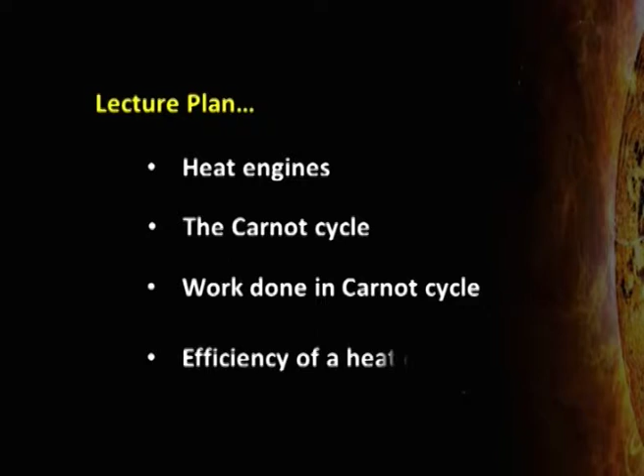In continuation, today we are going to discuss heat engines, Carnot cycle, work done in Carnot cycle and efficiency of heat engines. At first, let us discuss what is a heat engine. The flow of heat from a hot body to a colder body is a spontaneous process. The heat which flows spontaneously can be converted to useful work with the help of some device.

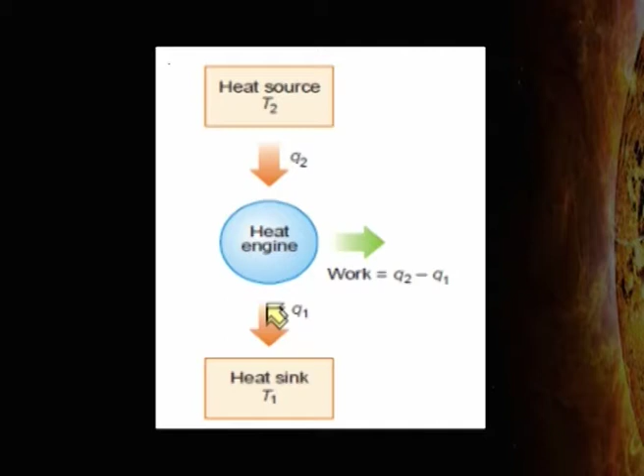A machine which can do work by using heat that flows out spontaneously from a high temperature source to a low temperature sink is called a heat engine. A heat engine works between two heat reservoirs, the hot reservoir and the cold reservoir. The hot reservoir is known as source and the cold reservoir is known as sink.

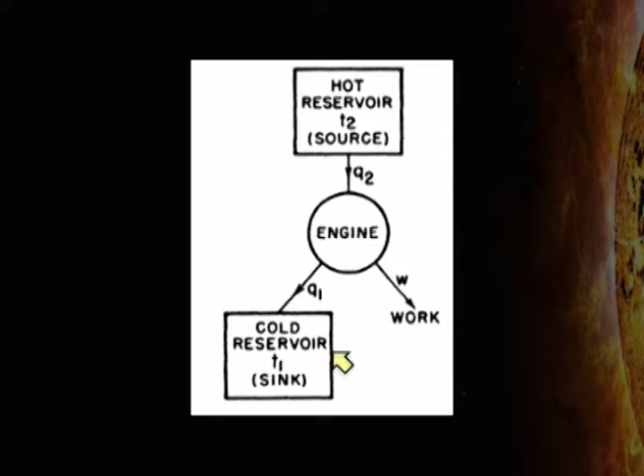Steam engine is a typical type of heat engine which extracts heat from the hot reservoir known as source, converts some heat to useful work and throws the remaining heat to the surroundings, which acts as cold reservoir, that is sink. A heat engine running in periodic cyclic processes can produce work continuously.

Now, what is efficiency of a heat engine? The ratio of work done by the heat engine to the heat absorbed by the heat engine from the source, that is from the hot reservoir, is called the efficiency of the heat engine. No heat engine, no matter how well it is constructed, can be 100% efficient. That is, no heat engine can convert all the heat extracted from the source to useful work. Some of the heat has to be thrown out to the cold reservoir, that is sink.

Sadi Carnot was the first scientist to realize this and deduce an expression for the work done in the Carnot cycle. Carnot employed a reversible cycle to demonstrate the maximum convertibility of heat into work. Carnot's engine or Carnot's cycle consists of 1 mole of a gas and it operates in 4 successive steps known as 4 strokes.

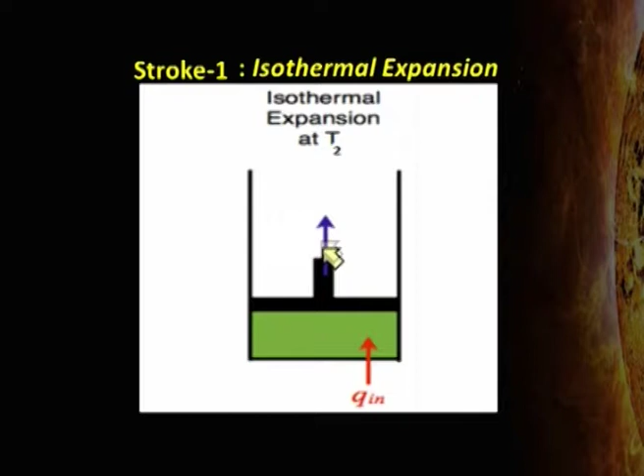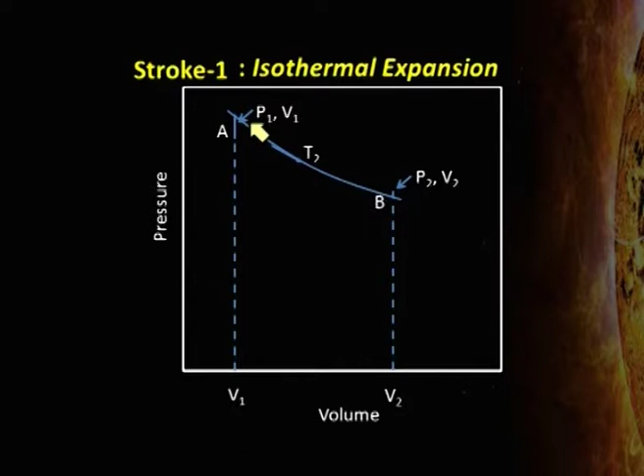Let us discuss the first stroke. It is isothermal expansion of the ideal gas. Ideal gas takes some heat from the source and it gets expanded. The gas is allowed to expand reversibly and isothermally at the temperature T2 so that the volume increases from V1, shown by the point A, to V2, shown by the point B, and pressure of the gas decreases from P1 to P2.

Since in isothermal expansion of an ideal gas, internal energy change remains 0, that is delta U remains 0. Hence, from first law of thermodynamics, delta U = Q + W, we can see that Q will be equal to minus W. In expansion, work is done by the system, hence work is taken to be negative. Therefore, from first law of thermodynamics, Q = -W.

If we say that Q2 is the heat absorbed by the system and W1 is the work done by the system, then Q2 = -W1, which will be equal to R T2 ln(V2/V1). This we have taken as equation number 1.

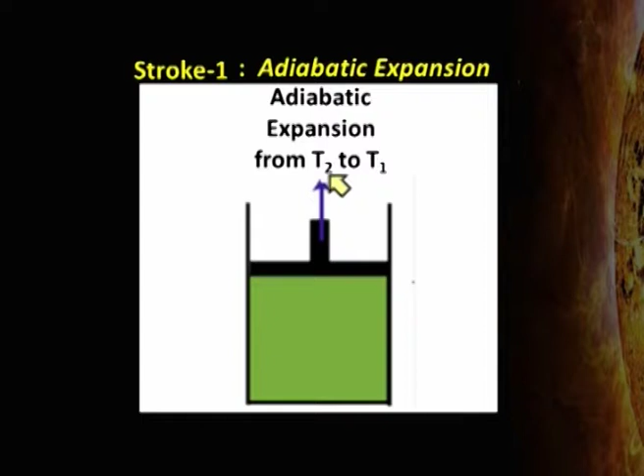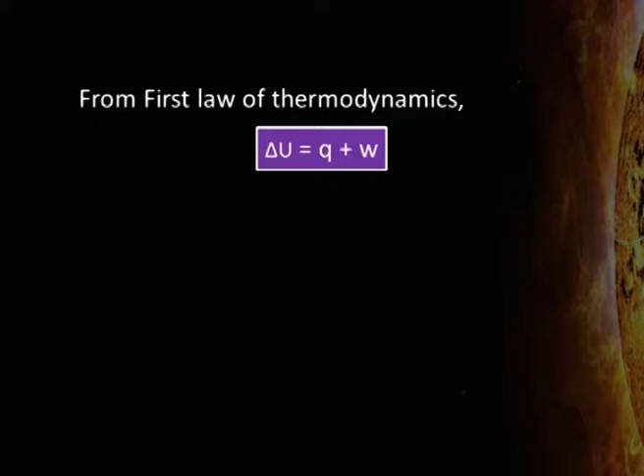As work is done here by the system adiabatically, the system cannot absorb any heat. Therefore, Q will remain 0. Now from first law of thermodynamics, delta U = Q + W, we will get delta U = W. Here also expansion is going on, hence work is done by the system on the surroundings. Hence by definition we will get CV = dU/dT at constant volume.

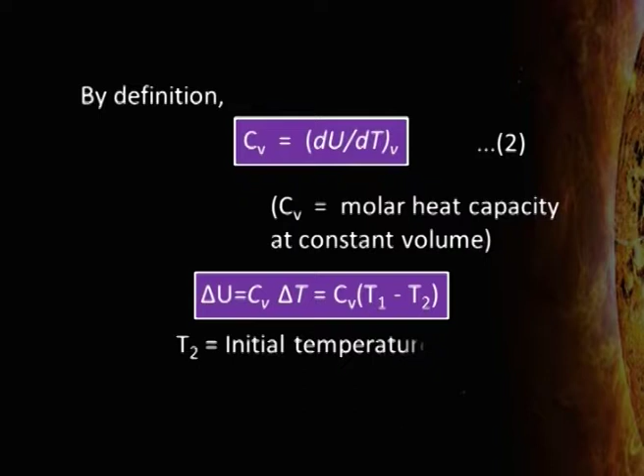Here CV is the molar heat capacity at constant volume. This is equation number 2. Now for a finite change, delta U will be equal to CV delta T, or we can say CV (T1 minus T2). Here initial temperature is T2 and final temperature is T1. Therefore, CV (T1 minus T2) will be equal to minus W. This is equation number 3.

Delta T is the change in temperature, which is equal to final temperature minus initial temperature, or we can say that minus W equal to minus CV multiplied by (T2 minus T1), which is taken to be equation number 4. If the work done in this stage is denoted by W2, then we will get minus W2 equal to minus CV multiplied by (T2 minus T1). It is equation number 5.

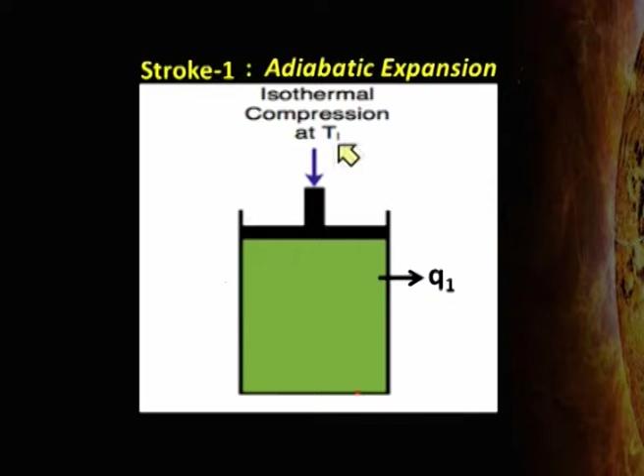Now we will go to third stroke. Third stroke is reversible isothermal compression at temperature T1. Here the gas will release some amount of heat which is taken to be equal to Q1. During isothermal compression, the temperature remains same at T1. Volume decreases from V3, which is denoted by point C, to V4, which is denoted by point D. Pressure increases from P3 to P4.

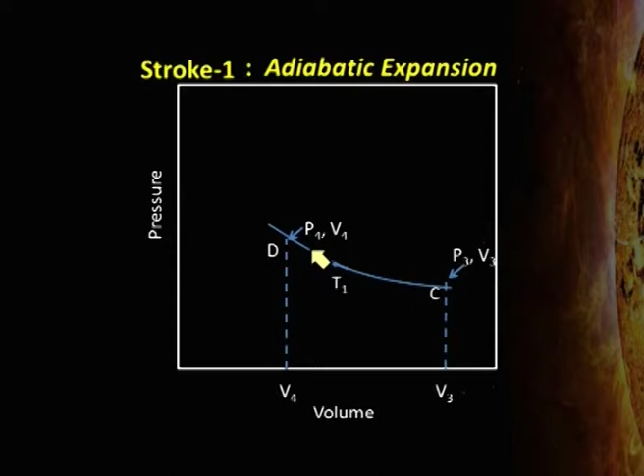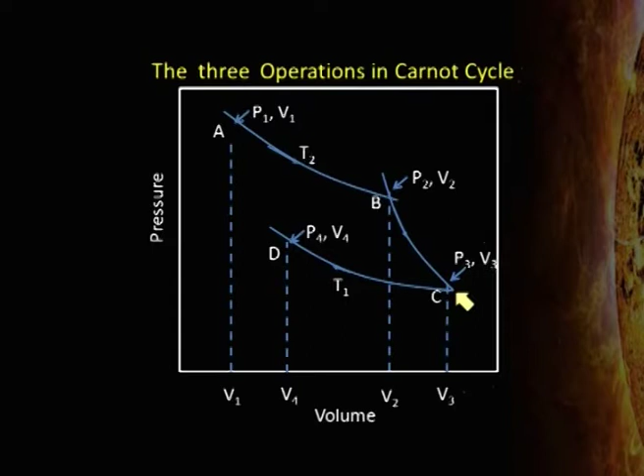You can see the 3 steps in succession. First one, reversible isothermal expansion. Second, reversible adiabatic expansion. And the third one, reversible isothermal compression. In isothermal compression, delta U will be equal to 0. And in compression, work is done on the system by the surroundings. Hence, W will be taken to be positive.

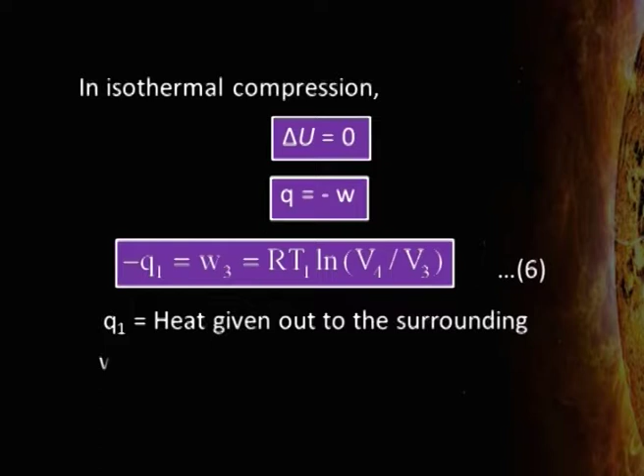From first law of thermodynamics, we can say that delta U is equal to Q plus W, and as delta U is equal to 0, hence Q will be equal to minus W. But as work is done on the system, therefore work is taken to be positive. Hence, we can say minus Q1 equal to W3 equal to R T1 natural log V4 upon V3. This is equation number 6. Q1 is the heat given out to the surroundings and W3 is the work done in third stroke.

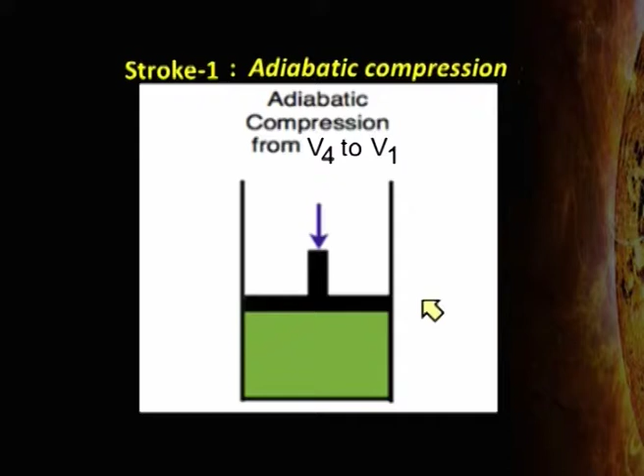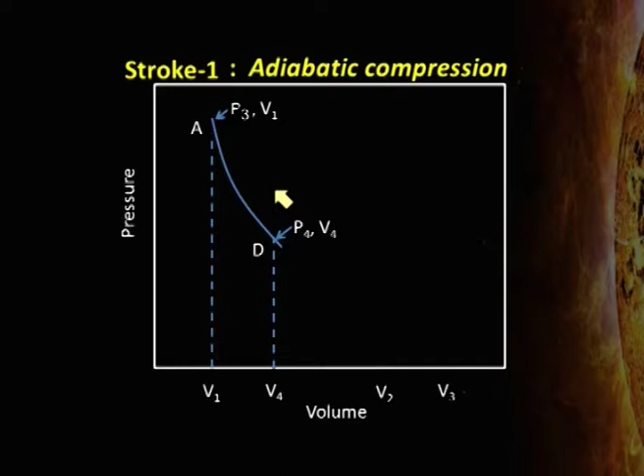In fourth stroke, we will go to reversible adiabatic compression. Here, the gas will be compressed from T1 to T2 and no heat will be absorbed or given out because the process is adiabatic. The adiabatic compression is done from V4 to V1. The volume of the gas decreases from V4 denoted by point D to V1 denoted by point A. Pressure will increase from P4 to P3.

The third operation is from C to D, which is reversible isothermal compression. The system changes from P3 V3 to P4 V4 at constant temperature T1, and the amount of heat which is evolved is equal to Q1. And the fourth step is reversible adiabatic compression D to A, and the state of the system changes from P4 V4 to P1 V1. Here no heat will be absorbed or evolved, but temperature changes from T1 to T2.

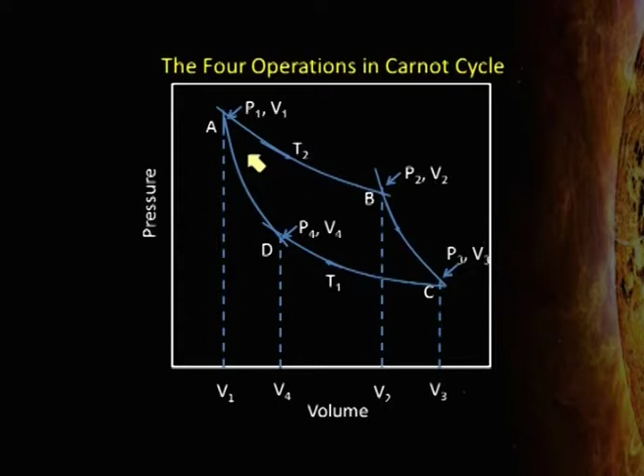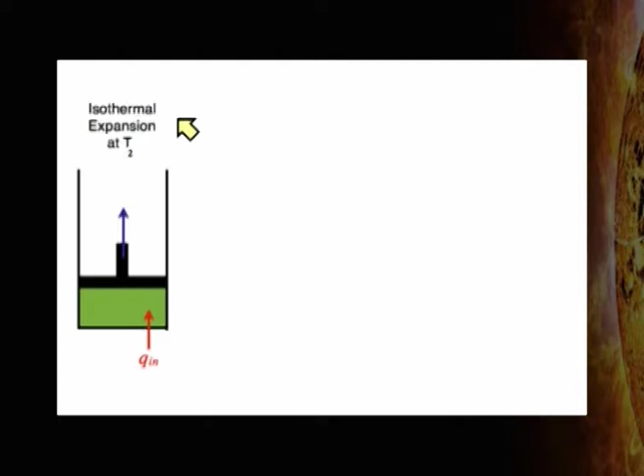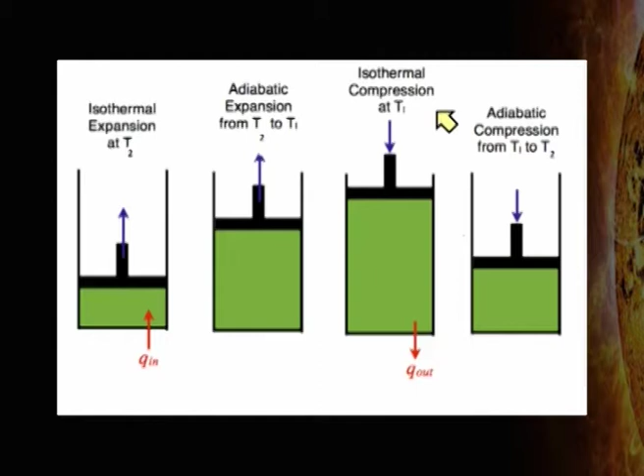First operation is isothermal expansion at temperature T2. Second, adiabatic expansion from T2 to T1. Third one, isothermal compression at temperature T1. And fourth one, adiabatic compression from temperature T1 to T2. Now in fourth step, as it is adiabatic, no heat will be evolved or absorbed. Hence, Q will be equal to 0.

And from first law of thermodynamics, we know that delta U is equal to Q plus W. Therefore, delta U will be equal to W. In compression, work is done on the system. Therefore, work has to be taken to be positive. Therefore, delta U will be equal to CV delta T, which is equal to CV (T2 minus T1). If W4 is the work done in this stage, then W4 will be equal to CV multiplied by (T2 minus T1). This is equation number 7.

Here T2 minus T1 is the change in temperature, which is also the increase in temperature in adiabatic process. If we take the net heat absorbed in complete cycle equal to Q, then it will be equal to the heat absorbed in first cycle plus heat released in third cycle.

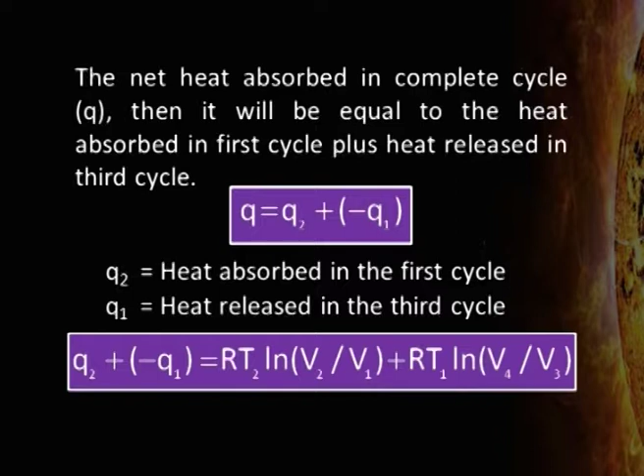Hence, total heat Q will be equal to Q2 plus minus Q1. It is because Q2 is the heat absorbed in the first cycle and Q1 is the heat released in the third cycle. So, Q2 plus minus Q1 will be equal to R T2 natural log V2 upon V1 plus R T1 natural log V4 upon V3. This can be written as R T2 natural log V2 upon V1 minus R T1 natural log V3 upon V4. This is equation number 8.

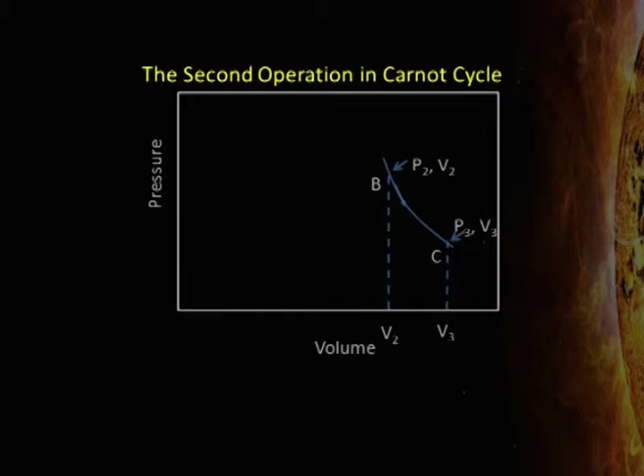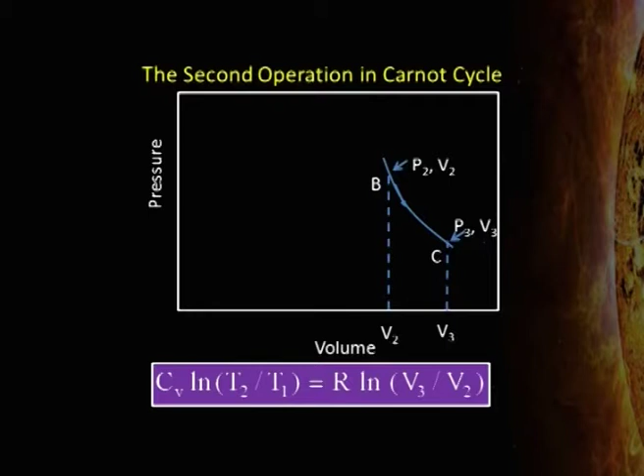For any adiabatic expansion for an ideal gas, we can take the example of the second and fourth steps in the Carnot cycle, which are adiabatic processes. If we take the example of the second step in the Carnot cycle from B to C, we can say Cv natural log T2 by T1 equal to R natural log V3 upon V2. And if we take the example of the fourth step in the Carnot cycle, which is also adiabatic from D to A, we can say that Cv natural log T2 by T1 equal to R natural log V4 by V1.

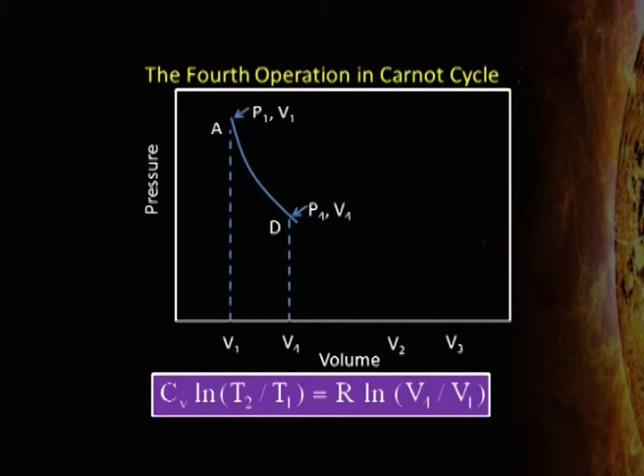Now from these two equations, we can say that V3 upon V2 equal to V4 upon V1, or V2 upon V1 equal to V3 upon V4. This is equation number 9. Hence, putting this value in equation number 8, we can get the value of Q, which is equal to Q2 minus Q1 equal to R (T2 minus T1) natural log V2 upon V1. This is given the equation number 10.

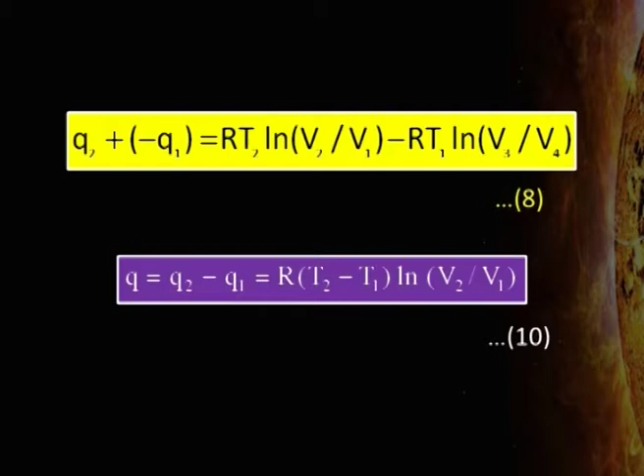Similarly, the net work done in the complete Carnot cycle can also be calculated. In the first and second step, the work is done on the surroundings by the system. Hence, the work done in the first step and second step are to be taken negative. In the third step and fourth step, work is done on the system by the surroundings. Hence, in these steps, work is taken to be positive.

Therefore, total work will be equal to minus W1 minus W2 plus W3 plus W4, which is equal to R T2 natural log V2 by V1 minus Cv multiplied by (T2 minus T1) plus R T1 natural log V4 by V3 plus Cv multiplied by (T2 minus T1). This is equal to R T2 natural log V2 upon V1 minus R T1 natural log V3 upon V4. This is equation number 11.

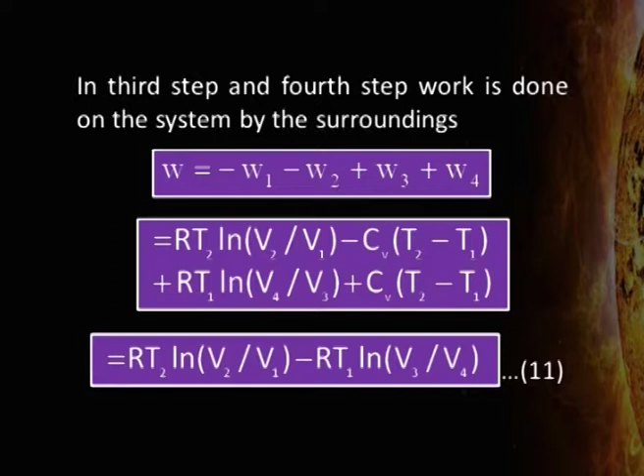Now putting the value of V3 upon V4 from equation number 9, which gives V2 upon V1 equal to V3 upon V4, we will get W equal to R multiplied by (T2 minus T1) natural log V2 upon V1. This is given to be equation number 12. It follows from equation 10 and equation 12 that Q is equal to W. Hence, the condition that the net work done by the system and the net heat absorbed by the engine are equal is fully satisfied.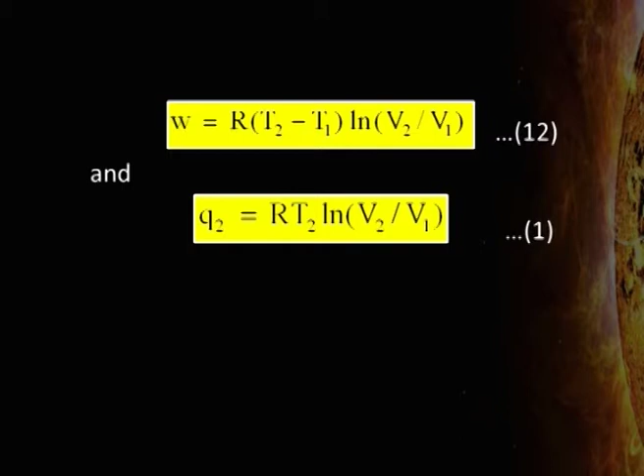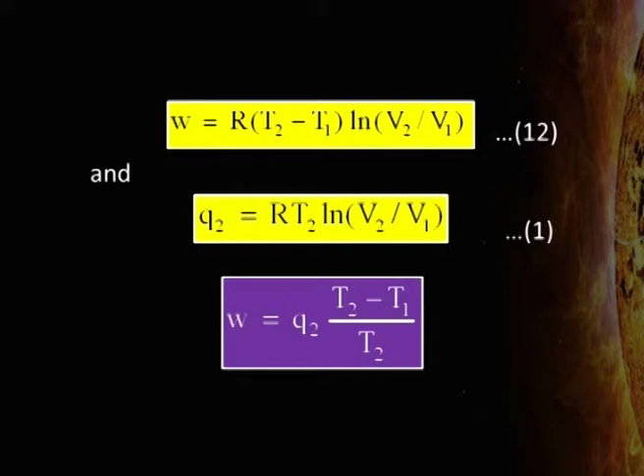The relationship between W, that is the net work done, and Q2, that is the heat absorbed from the source, meaning the reservoir at high temperature, can be derived for the Carnot cycle from two equations: equation number 12, which is W equal to R (T2 minus T1) natural log V2 upon V1, and equation number 1, which is Q2 equal to R T2 natural log V2 upon V1. Now from equation number 12 and equation number 1, we get W is equal to Q2 multiplied by (T2 minus T1) upon T2. This is equation number 13.

As (T2 minus T1) upon T2 is less than 1, therefore W is less than Q2. So, it can be said that only a part of the heat absorbed from the hot reservoir at temperature T2 is converted to work, and the rest of the heat is given out to the second reservoir, which is the cold reservoir or sink at temperature T1.

Based on these observations, Lord Kelvin stated the second law of thermodynamics as: it is impossible to use a cyclic process to extract heat from a reservoir and to convert it into work without transferring at the same time a certain amount of heat from a hotter to a colder part of the body. This statement recognizes the fact that no heat engine can be 100% efficient because some part of the heat extracted from the hot reservoir has to be thrown out at the cold reservoir at lower temperature T1.

Another definition was given by Clausius for the second law of thermodynamics. It is impossible for a cyclic process to transfer heat from a body at a lower temperature to one at higher temperature without at the same time converting some work to heat.

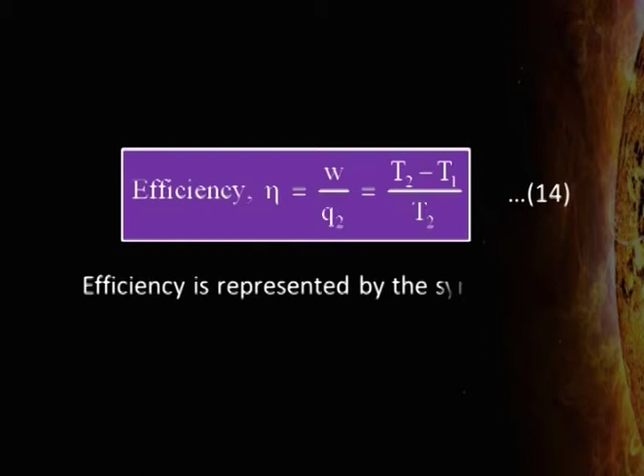Efficiency of heat engine is defined as the ratio of the net work done W by the heat engine to the heat absorbed by the engine at the higher temperature T2, which is given as Q2. Therefore, we get efficiency equal to W upon Q2 equal to T2 minus T1 upon T2. This is equation number 14. Efficiency is represented by the symbol eta.

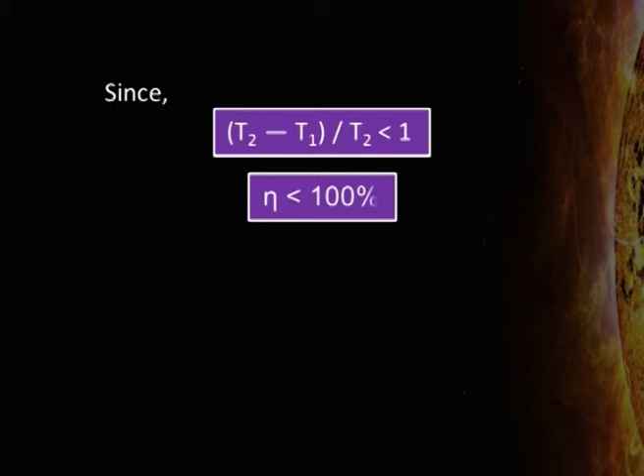Since T2 minus T1 upon T2 is less than 1, hence efficiency is always less than 100%. The efficiency will be larger if the difference between the two temperatures, that is the temperature of the source and the temperature of the sink, is larger. This is the reason why superheated steam is used in steam engines.

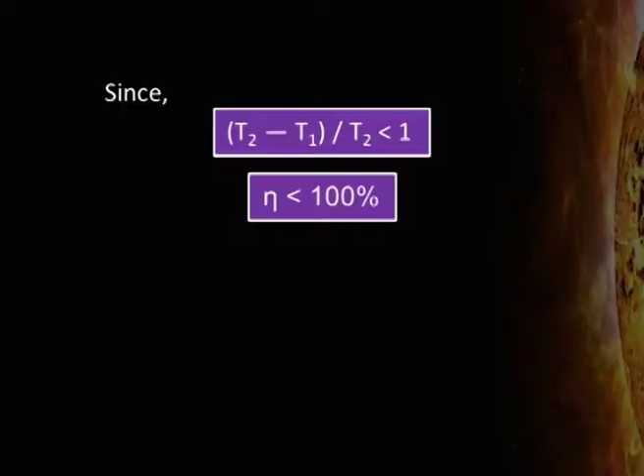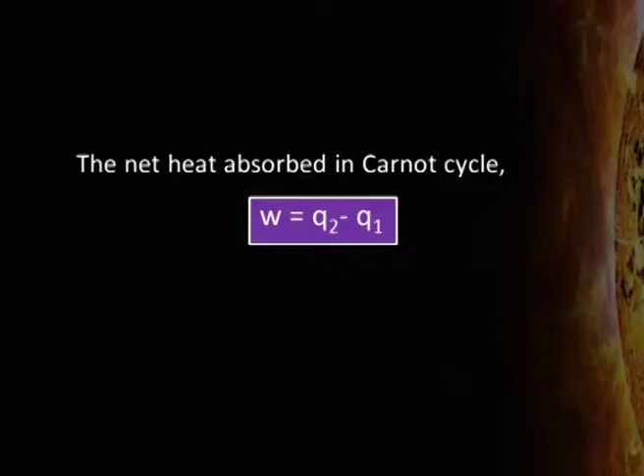It is also evident from the equation for efficiency that efficiency will be maximum, that is it will be equal to 100%, if T1, that is the temperature of the sink, is 0 Kelvin. The net heat absorbed in Carnot cycle is equal to Q2 minus Q1. Now from first law of thermodynamics, it must be equal to the net work done by the system. Therefore, W must be equal to Q2 minus Q1.

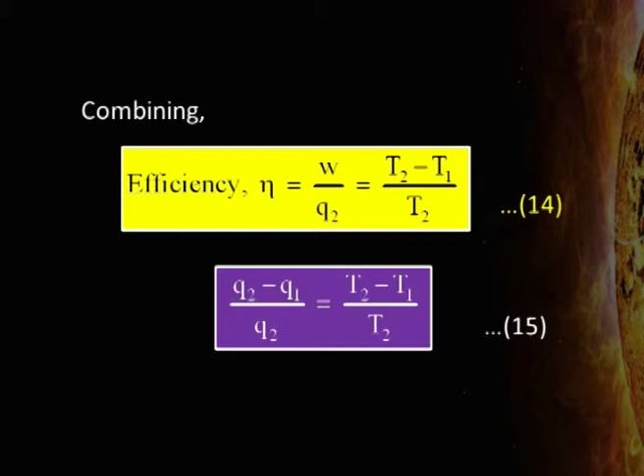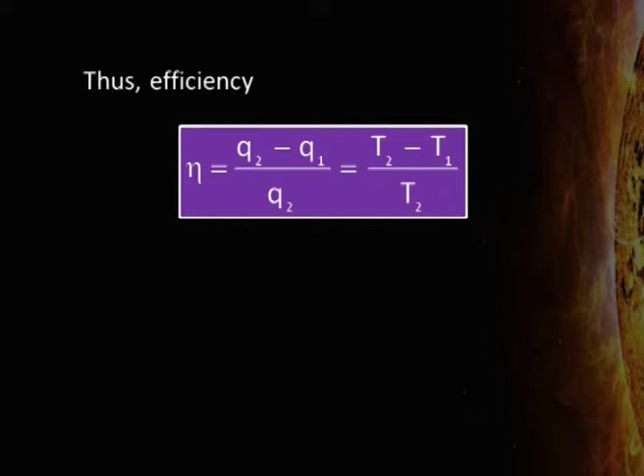Combining this equation with equation 14, we will get Q2 minus Q1 upon Q2 equal to T2 minus T1 upon T2. This is equation number 15. Hence, efficiency eta will be equal to Q2 minus Q1 upon Q2, which is also equal to T2 minus T1 upon T2. Here Q2 is the amount of heat from the hot reservoir, that is source, and Q1 is the amount of heat which is given out to the sink.

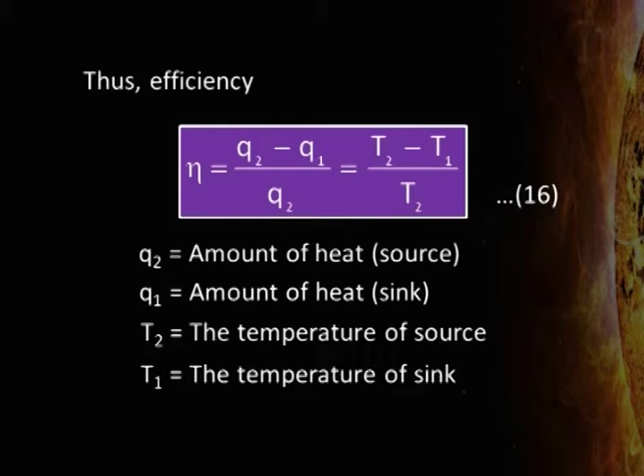T2 is the temperature of the hot reservoir, that is source, and T1 is the temperature of the cold reservoir, that is sink. This equation for the efficiency of heat engine has been arrived at by assuming that the heat engine or Carnot cycle operates on reversible cycles. But in actual practice, it is not possible to operate a change infinitesimally slowly. Hence, the efficiency of the heat engine in actual practice will be less than the efficiency given by the equation.

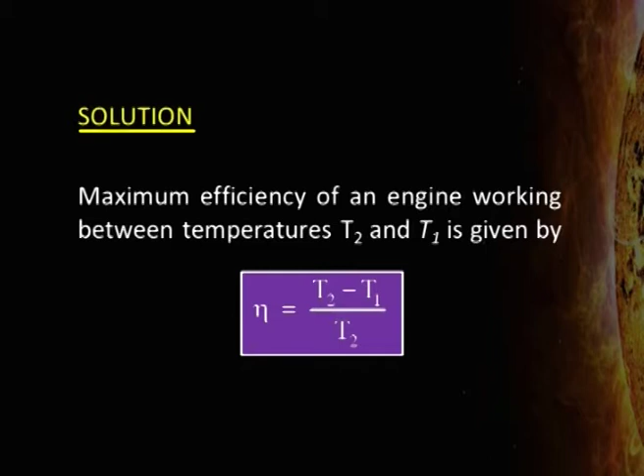Now, we are going to discuss some examples related to calculation of efficiency of heat engine. First one is: calculate the maximum efficiency of an engine operating between 110 degrees Celsius and 25 degrees Celsius. Maximum efficiency of an engine working between temperatures T2 and T1 is given by eta equal to T2 minus T1 upon T2. Here T2 is 383 Kelvin and T1 is 298 Kelvin. Therefore, efficiency will be equal to 383 minus 298 upon 383, which is equal to 0.222, or we can say it is 22.2%.

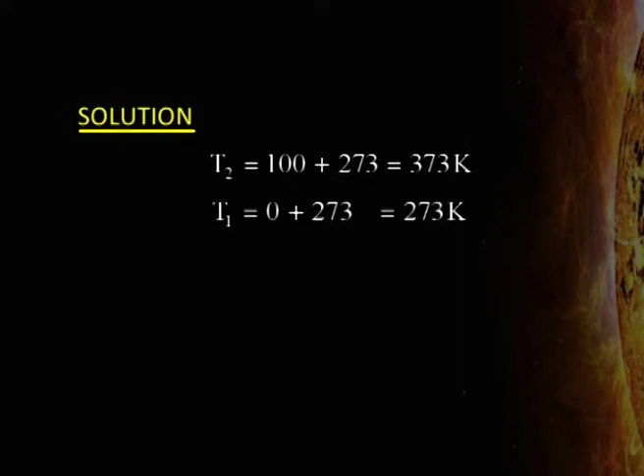There is another example to calculate the maximum work that can be done by a heat engine. Heat supplied to a Carnot engine is 453.6 kilocalories. How much useful work can be done by the engine which works between 0 degrees Celsius and 100 degrees Celsius? Here, higher temperature, that is the temperature of source, is equal to T2, which is equal to 100 plus 273 equal to 373 Kelvin. And the temperature of sink is equal to 0 degree Celsius, which will be equal to 273 Kelvin. Q2, which is the amount of heat absorbed, is equal to 453.6 kilocalories, which will be equal to 453.6 multiplied by 4.184 kilojoules,

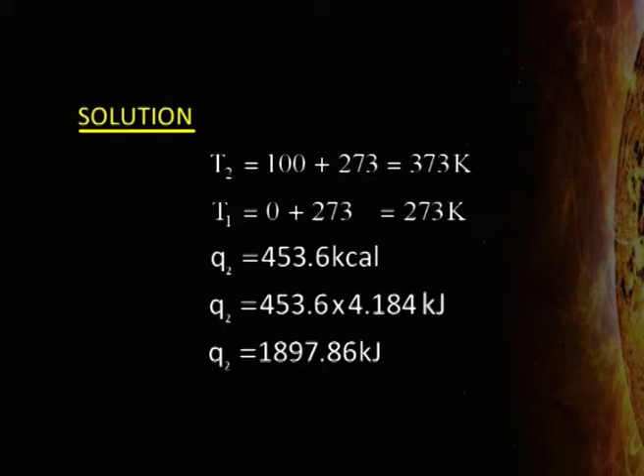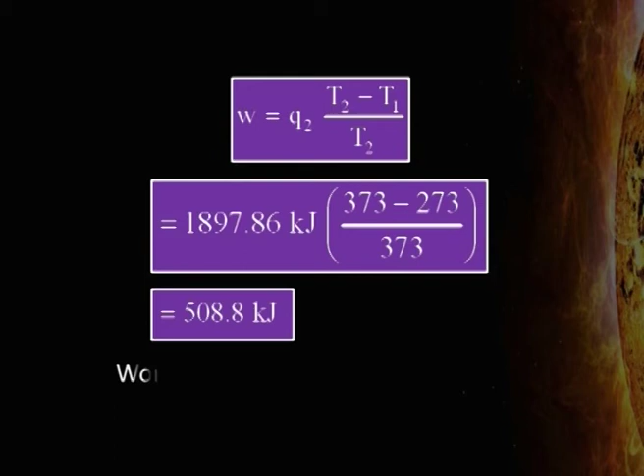equal to 1897.86 kilojoules. Now putting all the values in the equation, W equal to Q2 multiplied by T2 minus T1 upon T2, we will get 1897.86 multiplied by 373 minus 273 divided by 373, which is equal to 508.8 kilojoules. Therefore, maximum work done by the engine will be equal to 508.8 kilojoules. In the end, let us revise what we have discussed today.

Today we talked about heat engines, Carnot cycle, work done in Carnot cycle and efficiency of heat engines. In continuation, in the next lecture, we will discuss Carnot's theorem and the calculation of expression for entropy from Carnot cycle.